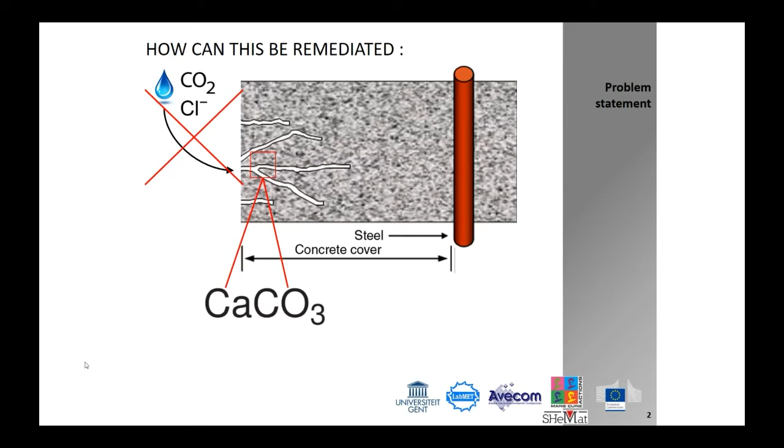If you have it, just give me a signal. Yeah, we have it. You are watching the live stream, so that's 10 seconds later. So you will get it. I will start already.

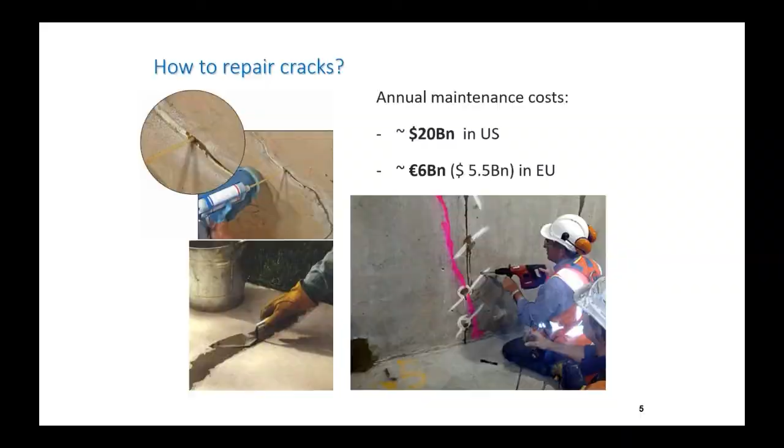But you see there a tremendous, I think we jumped one slide, but okay. You see there a tremendous amount of money that relates to having this slide, but it is actually not complete. There it appears. We talk about billions in the US and also billions in the EU of job opportunities in repairing cracks. I have to accept that. The next slide, if you give me the next slide. Yeah, it's coming. Thank you.

But the story that I like to bring to all these young people is that the world of publication is something that continuously helps to self-propose and propel what is happening. So there are lots of reviews on this, and if you look in those reviews, you see that indeed there is a tremendous amount of things going on in that concept of self-healing. Yet, once again, talk to practice and you find another perspective. At least that's what I experienced.

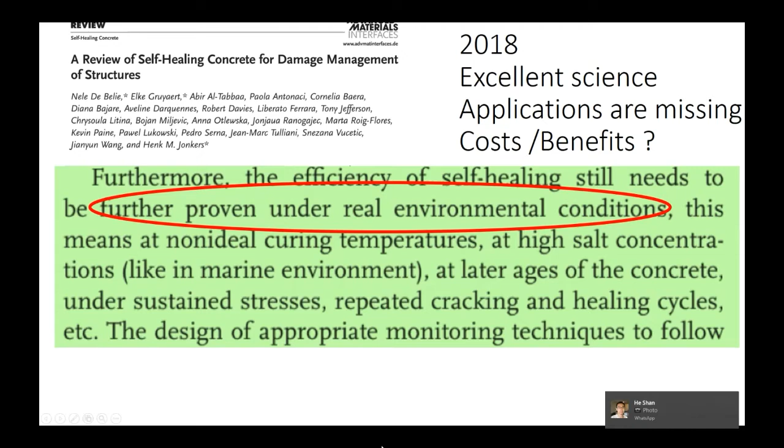To be frank, that's a long time, so we have to wonder what is happening. Why does it take so long? My story is, there is excellent science in this domain, but the applications are missing. What are the reasons? What is the cost balance? Is the cost-benefit balance maybe one of the problems that we have to dare to address more critically? Next slide.

The next slide tells you that autogenous healing, that means at very small cracks of 0.3 millimeter, can happen by itself, but the key feature of biological healing would be that we can deal with bigger cracks. That would be the thing that we'd really like to have, and then we have the term microbial

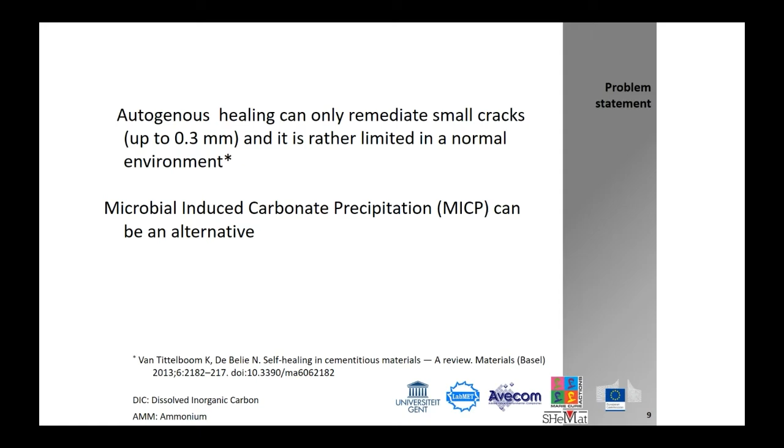induced carbonate precipitation. What a beautiful story! Bacteria who make carbonate, and indeed, this all was described and has been further explored in the literature ever since. Next slide. The next slide I have called The Road in Good Faith. And the road started in 2000. That's when I started to work on it together with many people.

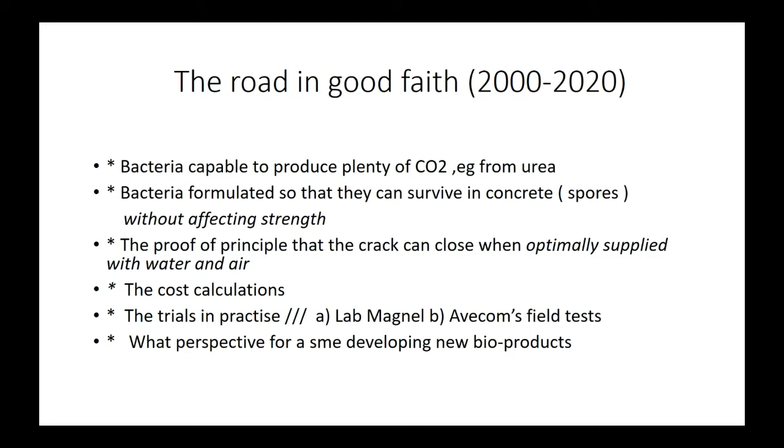The idea was that bacteria are capable to produce plenty of CO2, for instance, from certain compounds like urea. But bacteria produce CO2 normally because they oxidize certain organic matter, and then CO2 is a kind of burning product. They burn organic matter, glucose, sugars, and then they produce CO2 just like an engine burns a fuel and then produces CO2.

If we give them urea, this is a different thing. There they set free the CO2 because their initial idea was probably to get the ammonia. So we use there a very special reaction of these bacteria.

So, oh, this is better. I have now a sight, but it comes after I am speaking. I continue with the slides, but there is no synchrony, I think, between the slide and my picture. Is that correct? No, you're watching the live stream, which is about 10-15 seconds later. So that's why you also see the slides later. But we hear you live, so that's good. So don't look at the screen when you're talking. Thank you very much. Go back one slide now. Back one? Go to the previous one. It will come up at your screen in a minute. Now it's there. This one? It's the road in good faith. Okay, thank you. I'll continue. It's a bit of a difficult story.

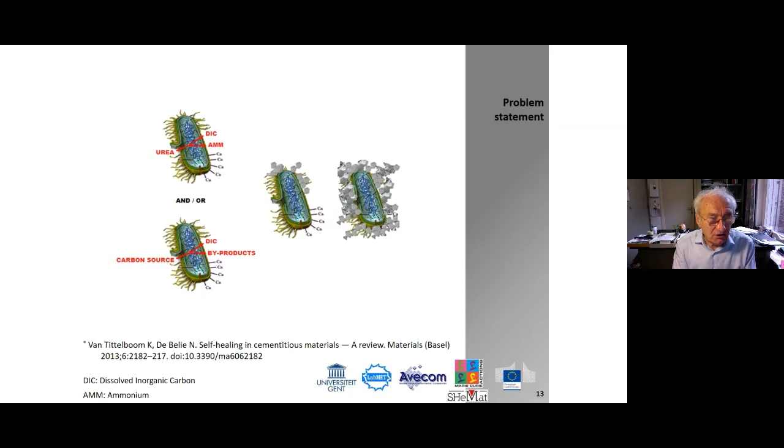When they take urea and hydrolyze it, this urea produces ammonia, and together with the ammonia comes CO2, these bacteria are under very great stress. They are doing something totally abnormal, certainly not how they would live in their normal life, and they end up becoming entombed in a kind of calcium carbonate matrix.

That idea fits our project, and we don't have to have mercy with the bacteria. They do something useful, at least to us at that moment. But basically it's not a real natural process - we use something as a sidekick of a natural phenomenon.

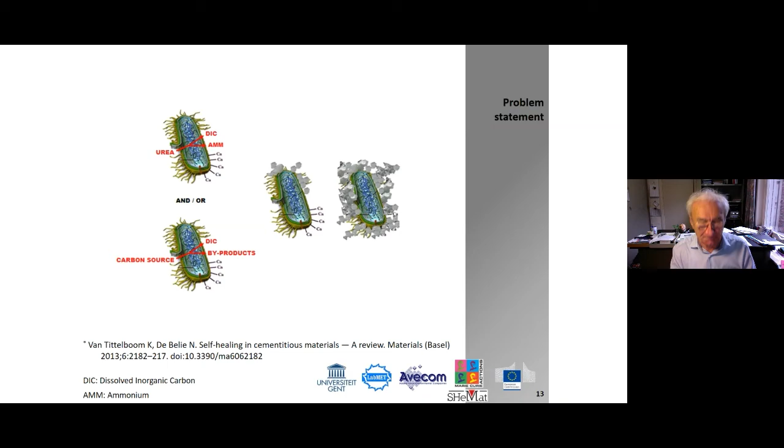In the next slide, you see, as you've seen before, that when you have a crack, and at the side of the crack there might be urea that comes free and was present, or urea from the outside, and bacteria are there, then you can have this biologically catalyzed phenomenon, and the crack will fill up.

That is well established and it's beautiful - you see it happening and there are many pictures like that, and that is great. But the question we have to ask is: is this really feasible? What are the side aspects?

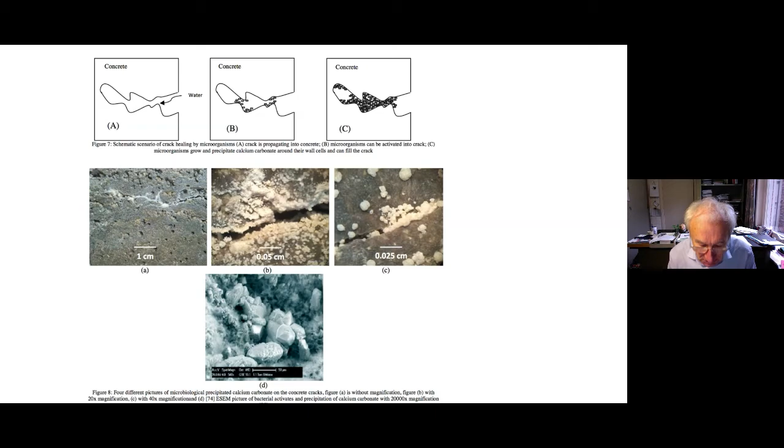The next slide tells you that to do this, we need to bring in bacteria that withstand these adverse conditions of being incorporated. Bacterial spores can indeed survive for several years, even decades, but under nice conditions - for instance in soil or in certain tissue. Here we have concrete, which is such a harsh environment, so these spores probably are not, or certainly are not, in a very good condition.

So they can improve autogenous healing, as has been demonstrated, but to bring them in and really get them going, we need to protect them and supply them with nutrients so that when the crack opens at the spot where they are, they come and do something.

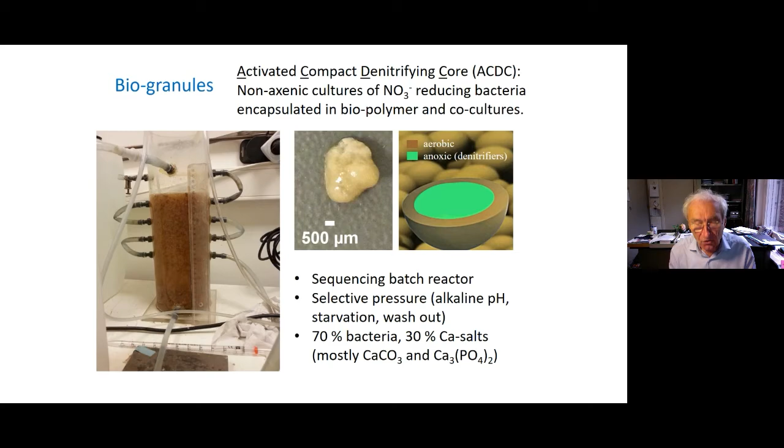The next slide tells you that indeed they do something. The biomortar was demonstrated by Yusuf to heal itself much better, really be very effective relative to the control. This demonstrates that this is not fancy, that this is reality, and that it can bring something forward. You see that the reference mortar's initial crack does not heal so very much if it's wide, but when the mortar and the culture are there, that's the red line, it really heals much better.

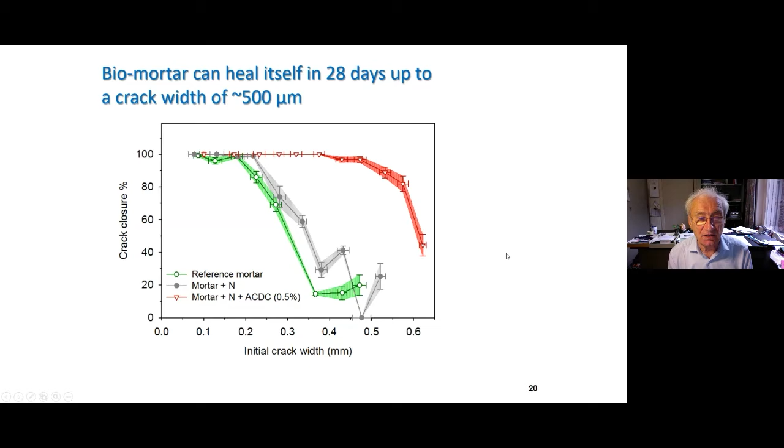The next slide shows you that in practice. It is indeed visible.

You have to click more. Yeah, here you see it. Oh yeah, there, yeah. Sorry, the bottom part is coming. Click further, yes. Yeah. Please click further. Yeah. If you can click further.

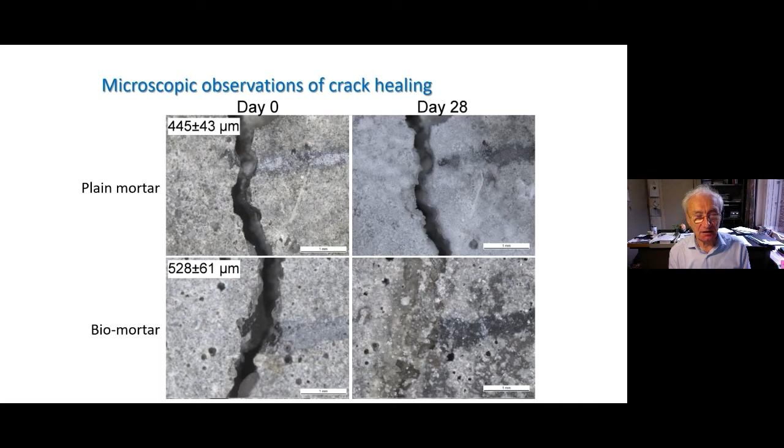You see nicely the plain mortar and the biomortar. I think this is very much an illustration of the work of Yusuf, that it can work. You see at the bottom, the biomortar, how this crack healed.

The next slide shows you the principles that are there, going much farther than just making CO2. They also demonstrate that you can make nitrite at this interface, and that altogether this can bring a kind of corrosion inhibition, a combination of corrosion inhibition and self-healing.

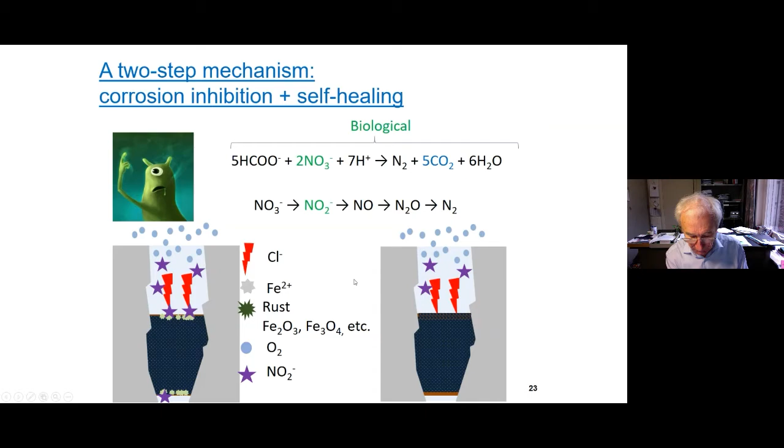Now, the side effect of urea - I already mentioned that you can affect the strength of the concrete, but here is a calculation if we use urea as a molecule to bring CO2 into the concrete. If you calculate this, as Philippe did, you find that concrete containing enough urea over its massive volume to heal the potential cracks has a tremendous amount of ammonia that can potentially get emitted. He compared it: a cubic meter of concrete would produce the amount of ammonia produced by 700 cows on a daily basis.

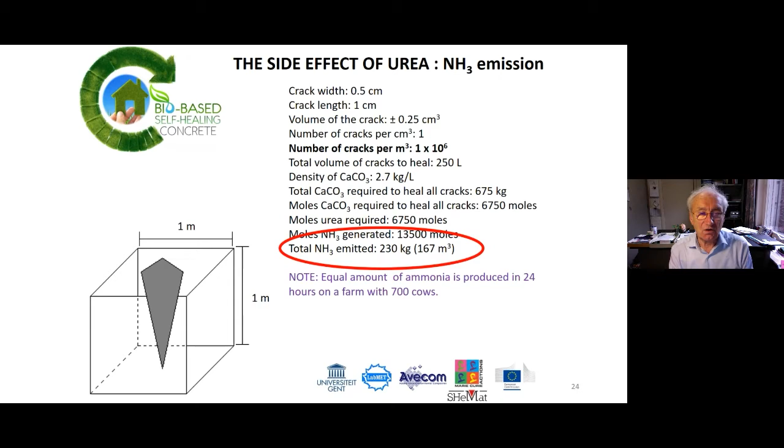It's just to tell you that we must look at the whole of the system. We indeed bring forward something, but we might have side effects that are not so nice, and that we should not disregard. In the next slide, we get the story on economy.

Most people had thought that bacteria were cheap, but it turned out when you start looking at them, you have to make them, guarantee their quality, and you have to add them in very large amounts to cover the whole concrete mass with that potential of self-healing.

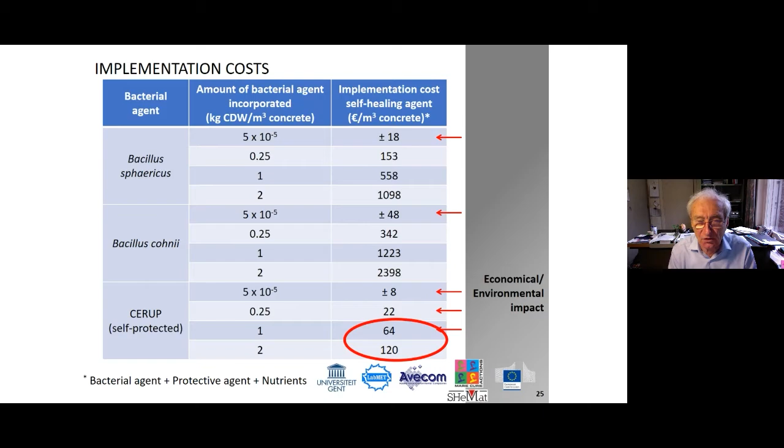Then you come to the costs, which you see here: Bacillus sphaericus, Bacillus cohnii, and CERUP. CERUP is a kind of industrially produced microbial formulation. The costs that you really come up with at the bottom, when you do it at the lowest cost possible, are still something like 60 to 120 euros that you have to pay for the bacteria per cubic meter of concrete. That is a hell of a lot of cost, and that is not possible. So those are some of the aspects you have to consider.

The next slide re-emphasizes this, saying that whatever way you look at it, it costs on the order of magnitude of certainly 10 to 100. If you look more carefully, somebody has to earn money by producing these bacteria, so it is expensive. Self-healing concrete costs around that order of magnitude. So the bacteria are not that handsome in terms of practice.

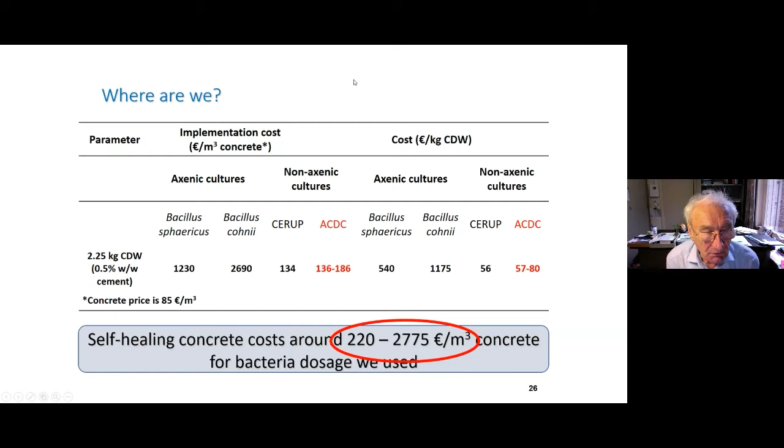So that is my bottom line, I apologize for that, but I think we have to put it in front of us. My general fact-finding is that in practice, the interest for self-healing concrete is, at least in my mind, not very large. So once again, when this started, and I was contacted by the people, I said I'm not saying no, but should we not really question ourselves?

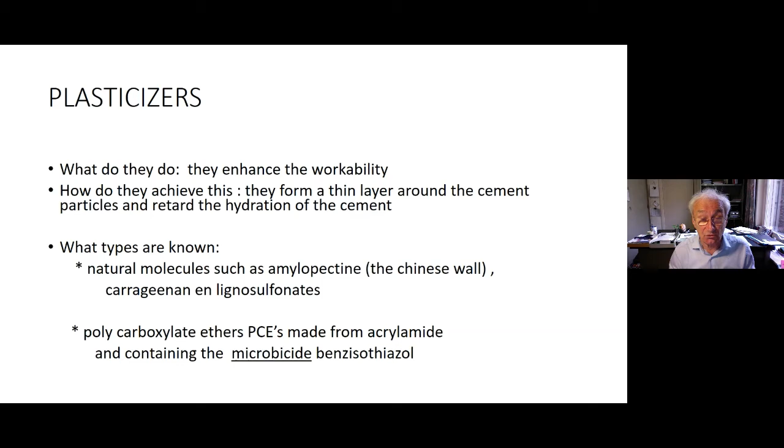But the miracle that has occurred is that the chemical industry has found polycarboxylate ethers, PCEs, which are made from acrylamide and which are stabilized by a microbicide, benzisothiazol, and that is a magnificent product. Next slide.

This product, that is what the people from practice say: if you could find something which is of biological origin, which is not containing this, I'm not saying toxic, but it is not a pleasant microbicide, that would be beautiful. That is the story that I got from talking with people in practice. They say, look, this is a beautiful product, no discussion, but it is expensive and it contains this chemical that irritates the skin of certain people.

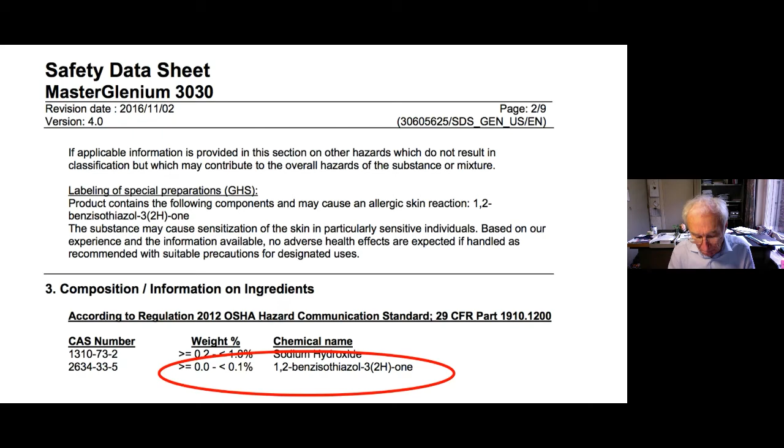Next slide brings me then to what I have identified, and I like to discuss with all of you, for the field of practice. What I have identified as a niche is to develop an alternative plasticizer, which immediately has a visible effect to the practitioner, because it has that plasticity in the system, and which maybe at a later stage, when cracks occur, becomes the site where the microbes from nature, from the outside or from the inside, I don't want to specify it yet, can start to grow and do a healing job. So I talk about the concept of a plasticizer facilitated self-healing.

That was, let's say, a consequence of talking with so many people, and that was the positive message I got through that. Of course, you don't have to agree with that. You can fully criticize it, and you have the full right to completely disagree with this.

But what we need to do that is, and it's not easy, to have a plasticizer which is as effective as this MasterGlenium and at competitive costs, which means that you have to apply it at a few euro per cubic meter of concrete. And it should be a product which does not influence the strength and can be accepted straight away by the regulator. The regulator is also a very important element.

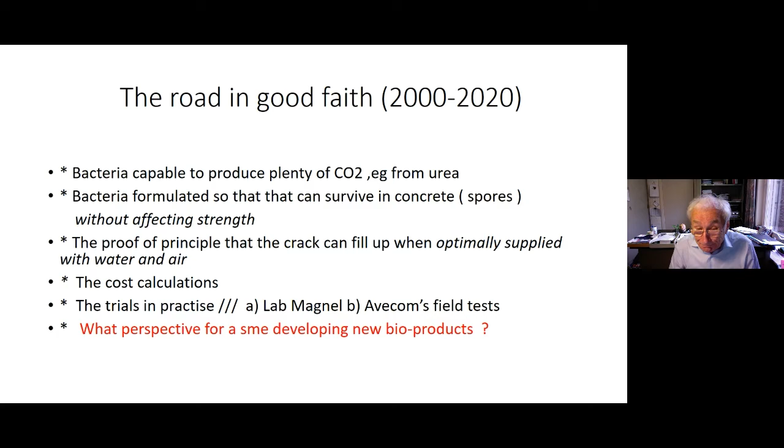I return to my story of my 20 years of good faith in this development. What perspective can a small and medium enterprise like Avecom have at this moment in developing a bioproduct which would fit in this configuration? That is the question that I have now to see in the concept of SMARTINCS. And I must be honest, an SME has to survive, and to develop something that has no direct application or will have an application maybe 20 years from here, that is not possible.

So the last slide of the story says, how do you address this? And I think the good way is that you start as an SME to look at the pull side. Avecom is developing bioproducts, but the question is, if you then talk with people from the cement and concrete industry, is there a pull? The push could come from SMARTINCS and Avecom, but the pull is these concrete firms. Are they really intrigued? Are they eager?

Is there any type of eagerness in that world to take on a new type of bioplasticizer? And if not, we have to admit that's the end of the line for an SME in this story. If there is a pull, then the push can be to look at different biomolecules and their effect on the microbial colonization and the concomitant healing of the treated concrete. That's then very clear.

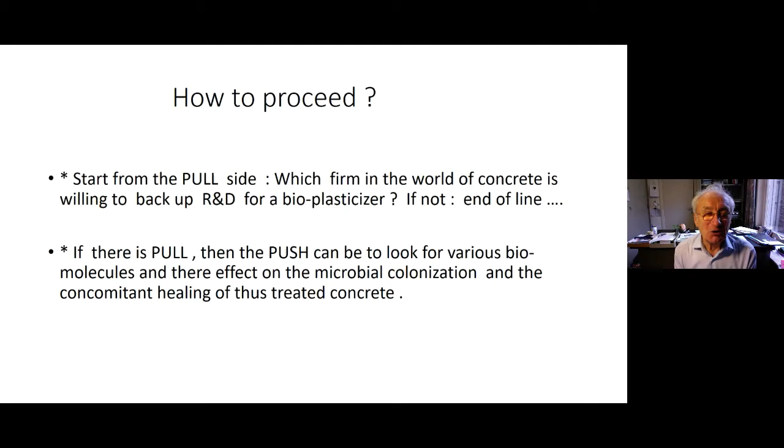So this is the end of my rather difficult presentation. I apologize that there was sometimes a bit of retardation, but I hope that you have had a message. Once again, it's not that I don't believe in the concept, but I think we must try and dare to address new perspectives for it.